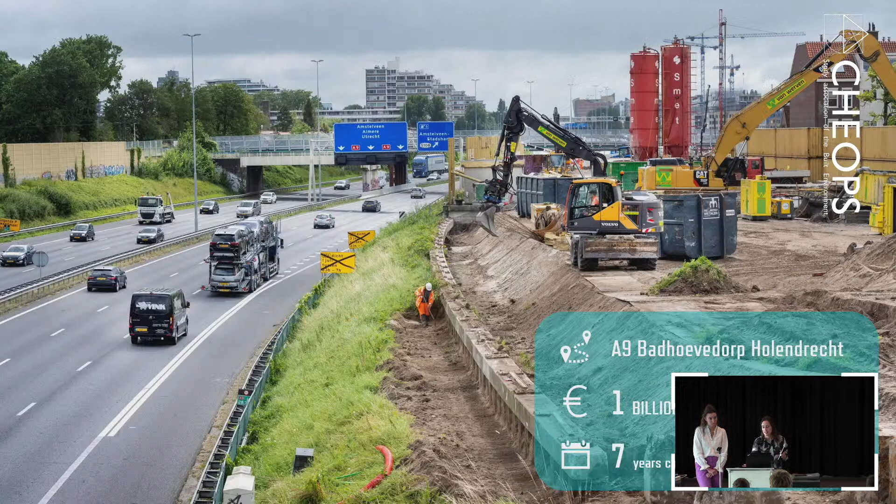So we will show you some main projects we're working on. This is the A9 - we're currently extending the track between Badhoevedorp and Holendrecht with one extra lane. This is the biggest project currently going on, with a value of 1 billion euros, so it's huge. We're working there for 7 years to construct it, but then we still need 15 years of maintenance.

What's so complex about this track is it's kilometers long, and you also have a lot of municipalities like Ouder-Amstel and Amstelveen, but also water authorities and many complex structures that also need to be widened. How we won the tender was that we promised the construction would be done side by side with the track.

So transport will always continue, we never close the main highway. You see in this picture that they're still driving but also working at the same time. And this is a picture showing demolition work on the left side where a bypass is being made.

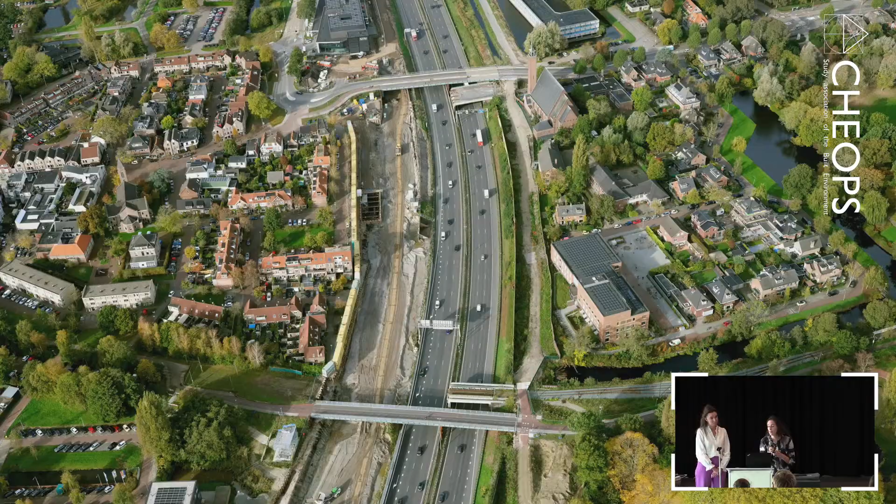Next to that, we also worked on the entree in Amsterdam, a bicycle storage. What's unique about it is it's underneath water, and that's the only one in the world right now. So what was complex about this project?

We were constructing in the middle of a crowded place in Amsterdam, so the building pit couldn't be that large. That's quite complex, and also all the transport had to move around the building pit. We did the project management of it and finished it in January this year.

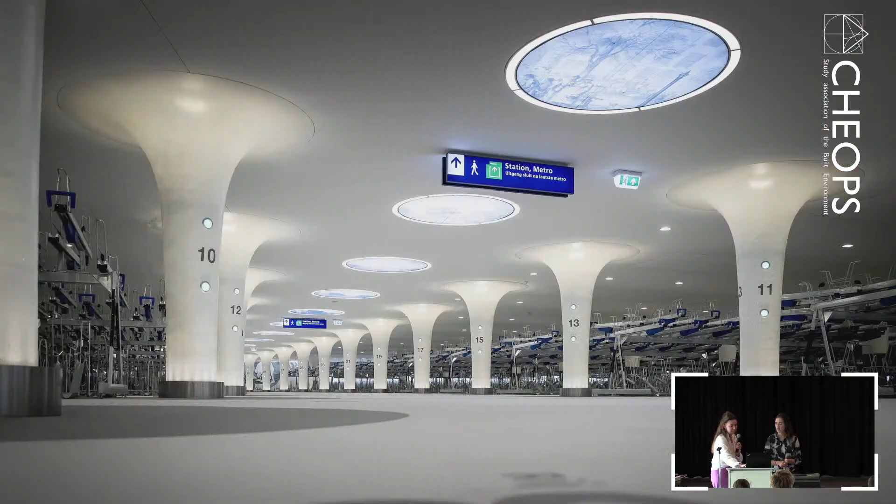So in the next picture you can see the inside of the bicycle storage. Maybe some of you already visited it.

Another one is Project Kademuren in Amsterdam, one of the projects I also worked on. Here we are renovating the quay walls in Amsterdam. As you probably know, many of these walls were constructed a long time ago, but not with the intention that so many trucks and tourists would be walking by.

So a lot of those walls are collapsing currently, and we got the arrangement to reconstruct 2 kilometers of quay walls over the coming 8 years. So this is also a quite big project.

It's also quite complex, similar to the entree project, because you're working in a really small area in the city center of Amsterdam. You have to deal with tourists using the canals for tourist boats, but also a lot of inhabitants living around there, and the houseboats as well. So you can imagine it's quite hard to build something like that in the middle of the city center.

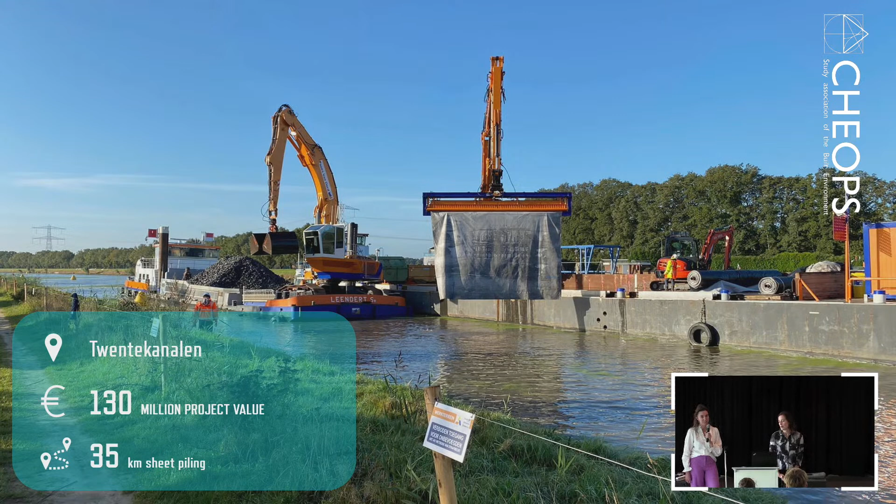Our slogan is 'building new ways'. There are many companies doing project management in such projects, but this company started about 10 years ago with the intention to do it in a smarter and newer way, because the construction market is very conservative, so there's not that much innovation.

We are trying to do that with the people we have, the technology we apply, and the partners we have. Of course, we're not the people who actually do the construction work, but we do the project management side. So inside our company, the people are the key asset, which is why Count & Cooper invests a lot of time and effort in people—through trainings and the selection procedure we have.

I really like that there's so much space for development and time to grow inside the company. So a lot of focus on the people.

And besides that, we really focus on tech. For example, at the Twentekanalen project, we implemented a dashboard where we can see the groundwater level along the whole channel. By doing that, we can see if, due to our work, the groundwater level is changing, stable, or increasing. When it increases, we get a notification and can immediately react. So we're improving construction and efficiency by implementing dashboarding.

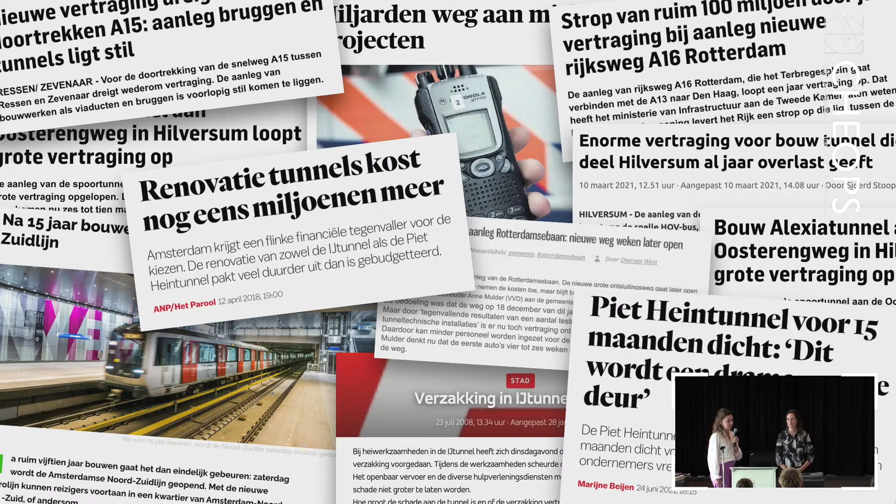We think it's no longer possible to just deliver projects by being good at construction. So we focus on delivery management, and we always think about what's best for the project, and therefore have clear communication, and of course technology always plays a role in it. Besides that, we think we can really change the construction sector by being part of it instead of just advising. That's also why we're not just a consultancy, because we're really participating in the project.

So we are focused on tendering and project management, but I can imagine that it's a bit vague what project management is. Here are some main things we focus on as a company. We often have people working in contracting procurement or financial control. Planning and risk is something we always do.

That's what I did in the Kademuren project. But also focusing on quality and performing audits to test your internal processes. We always have a stakeholder team from our side, like you are part of now.

And we have a whole team of digital project management. There's a whole team inside our company focused on data analysis, making things smarter and more efficient, and connecting data together. They're always connected, always part of our teams at the project. That's also a really nice area. We try to look at how we can make our teams work better together and more efficiently.

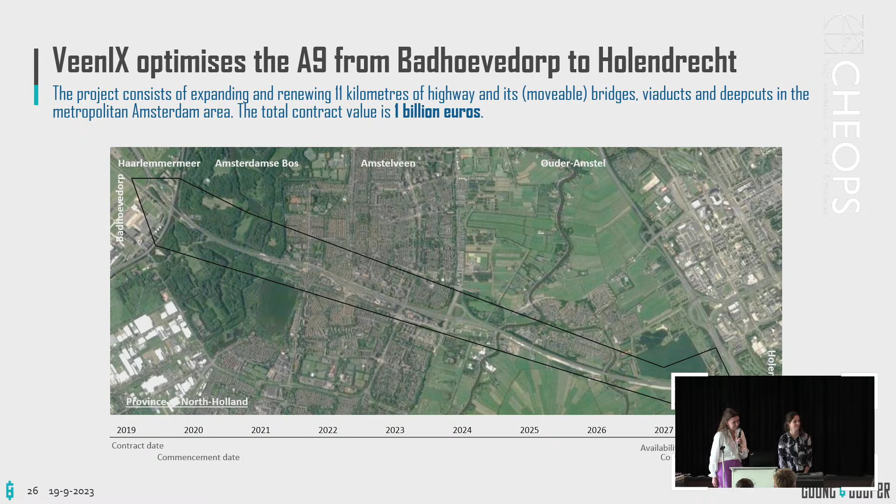If we zoom in a bit, the highway includes a lot of structures. In Dutch, we call it kunstwerken, so therefore we often use the letters KW to name the structure.

The highway crosses through the Amsterdamse Bos, so we cross this forest, and you have flora and fauna included in that. And we go through Amstelveen, so we have a lot of residents living really close to the A9. That's really important for the stakeholder management topic, to satisfy those people and prevent that our works result in too much noise and traffic hindrance. Besides that, the highway continues through Ouderkerk aan de Amstel, and the soil is really weak over there. Laura explained the name VeenIX is because of the highway going through Amstelveen, but it's also about the soil, which is veen in English, peat, and that's also quite challenging to work structures in those soil conditions.

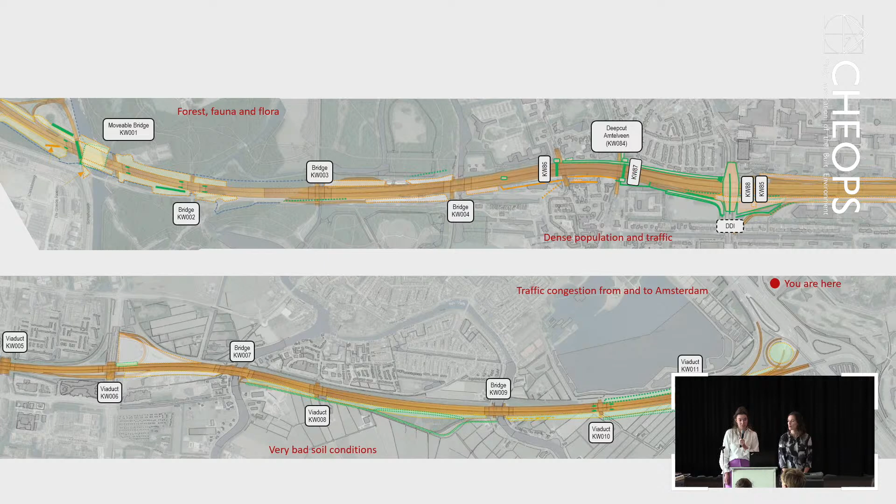Yes, and some facts in a row: this is a highway of 11 kilometers, there are 100,000 residents living around it, and the project is 1 million. It has a value of 1 billion euros. Every day 150,000 cars cross it, and we're going to construct, hopefully, for 7 years and not longer. The planning consists of 20,000 lines of activities that need to happen, so it's enormous.

And we have beforehand 6,500 requirements that are defined and that we all should meet during the project. We are working with around 500 people now, and more than 400,000 documents. So the project is very large. It's so different from the other things that I did before, but it's really nice to see and experience.

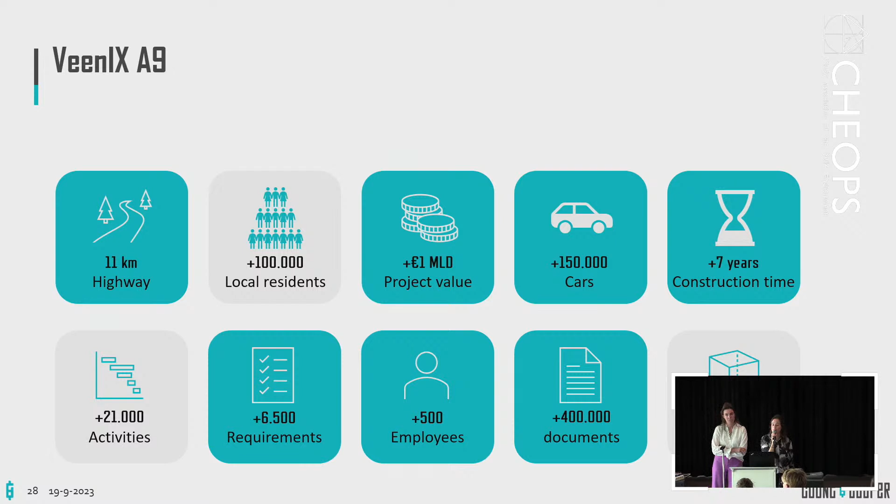And of course Rijkswaterstaat has some requirements that we need to work on together. We have to act responsibly with our stakeholders and satisfy them, look at the noise that we produce, and look for that. In the end, try to control the costs and also time, and focus on sustainability as well.

In order to complete a huge project like this, we divided the highway into 4 sub areas. One is the part on the west side, we have the middle side and the east side, and besides that we have the area paving and roads, which focuses on the highway itself, so asphalting and groundworks. Each sub area includes some complex structures.

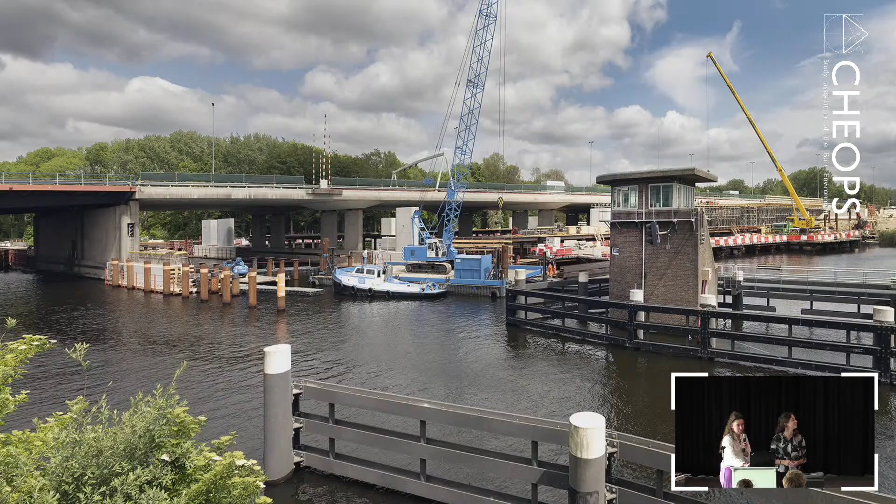Let's zoom in a bit. When we look at the west part, the most complex structure in it is the Schipholbrug, and I'll show it on the picture. You can see it right here. We want to widen the bridge, but since it's a bridge that should be open and closed, we need to replace it at once. But since we promised that the highway will always be open, we're currently building a highway next to it, an extra temporary bridge, in order to let the traffic go over that bridge. So that's quite complex, and you can see the final situation over here.

We also have a small movie about it, and it explains the construction of the Schiphol Bridge. It's in Dutch, but hopefully you can still understand it.

Wat is dit? Wait. Oh, it's reclame. Okay, I have it over here.

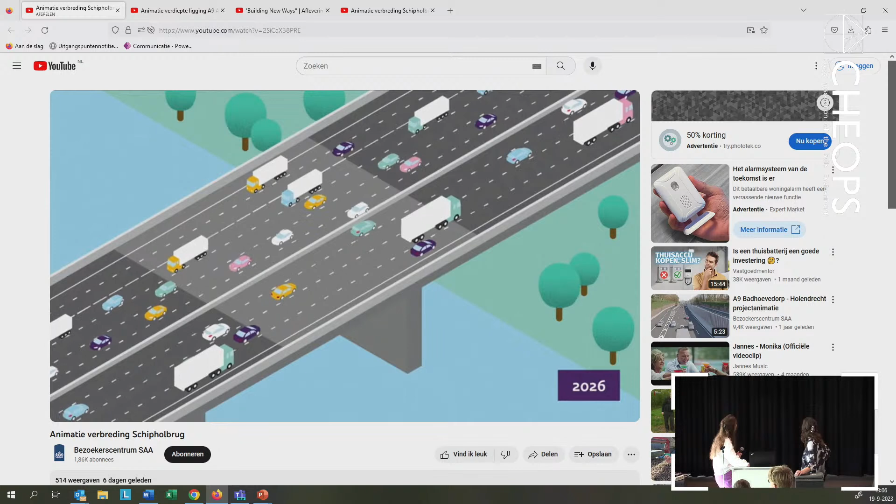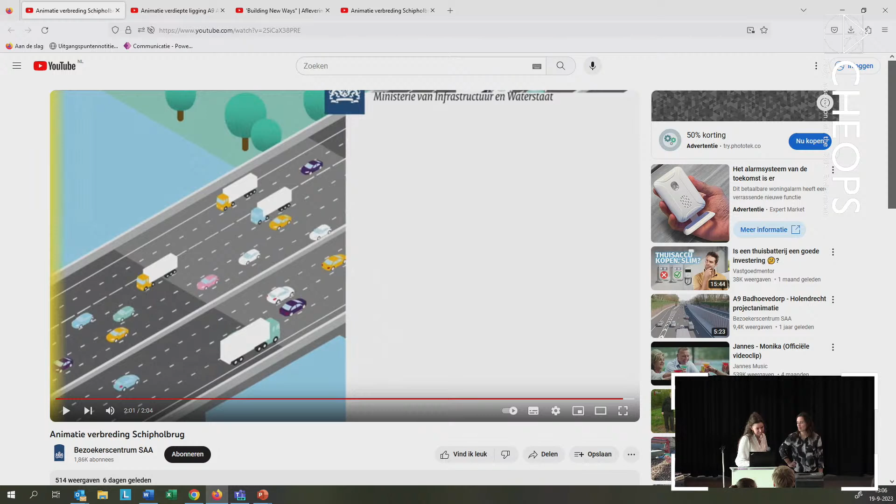Ja. Okay, great. Okay. Yeah.

So that's only the part west, but in the middle, they're going to construct a deep cut, with 3 roofs over it. I'll show a picture. It's kind of hard to explain, but it's also to reduce the hinder from noise from a side.

Currently, it's just a road. So the deep cut is quite complex if you look at the design. And also there's one viaduct and two bridges that need to be extended.

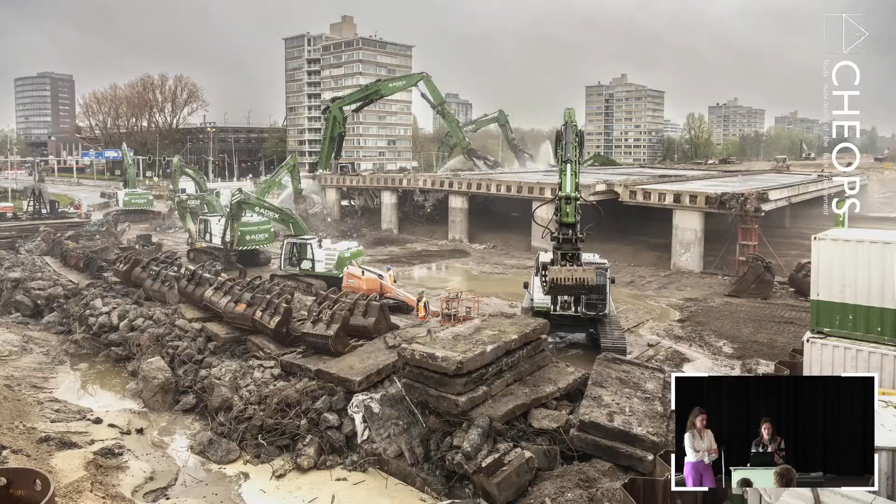And here you see one of the viaducts that's demolished already. So that's this viaduct that you're seeing, which is already demolished.

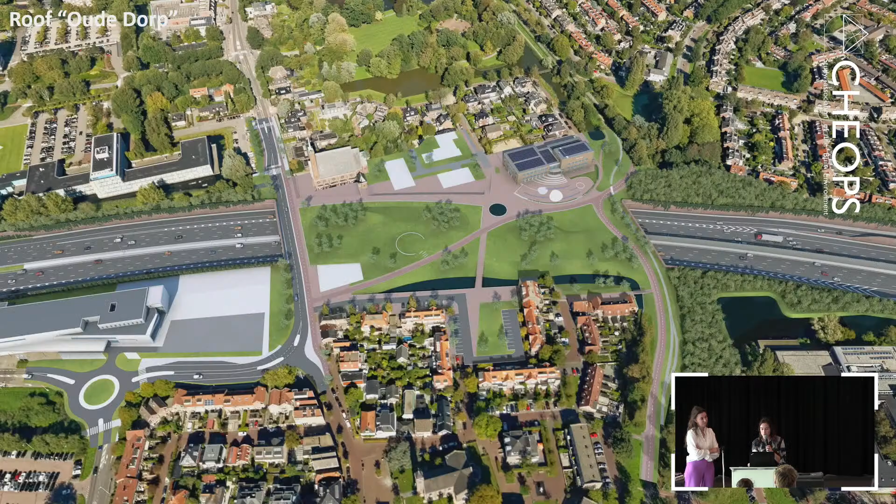In the end situation, there will be 3 roofs. One of the roofs will be like a city park, and the others will also include a cycling bridge or cycling path to connect north and south with each other. In total, there will be 3 roofs. This is one of the most complex parts of the project, as you can maybe imagine.

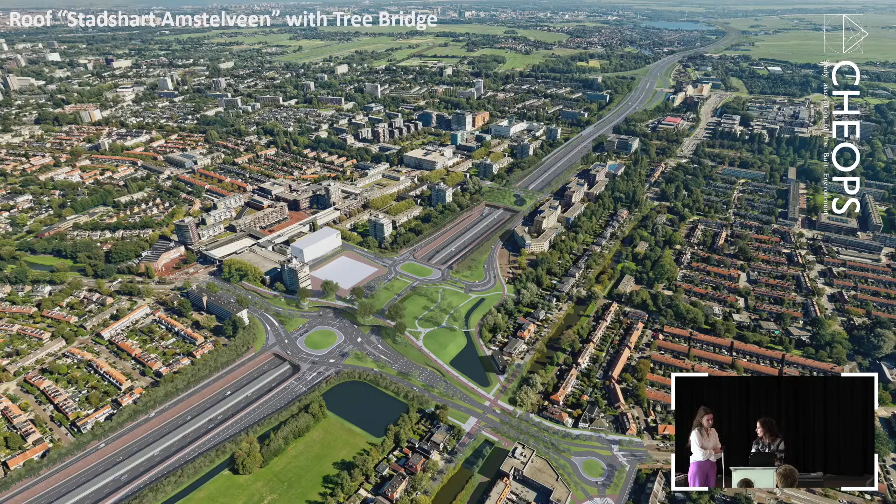I also have a small video to demonstrate it better than just pictures.

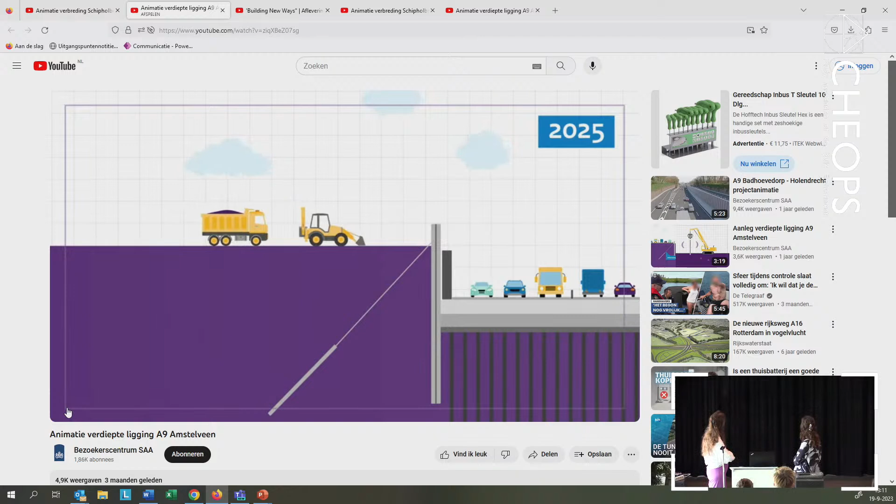So this shows all the steps that are needed to finish the deep cut.

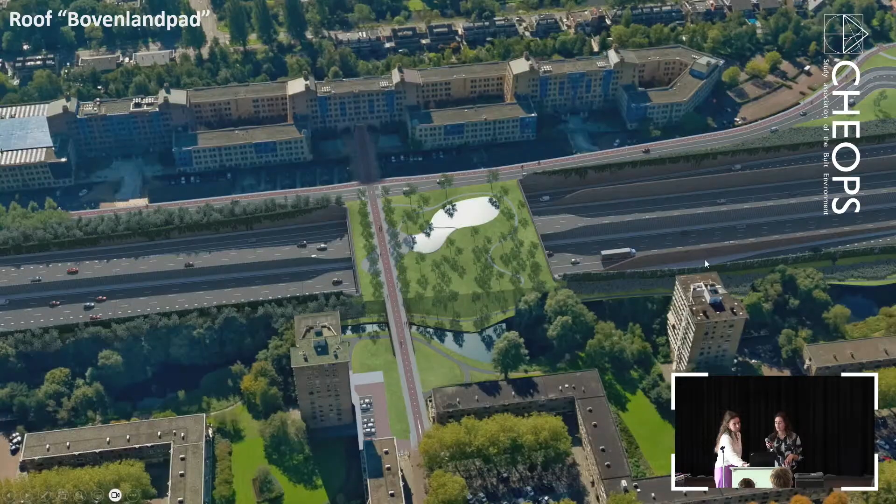Besides that, we have the section east. It's the largest section, and it includes a lot of civil structures, so viaducts and some bridges. And as I said before, the ground, the soil, is a bit weak over there, so that's quite challenging.

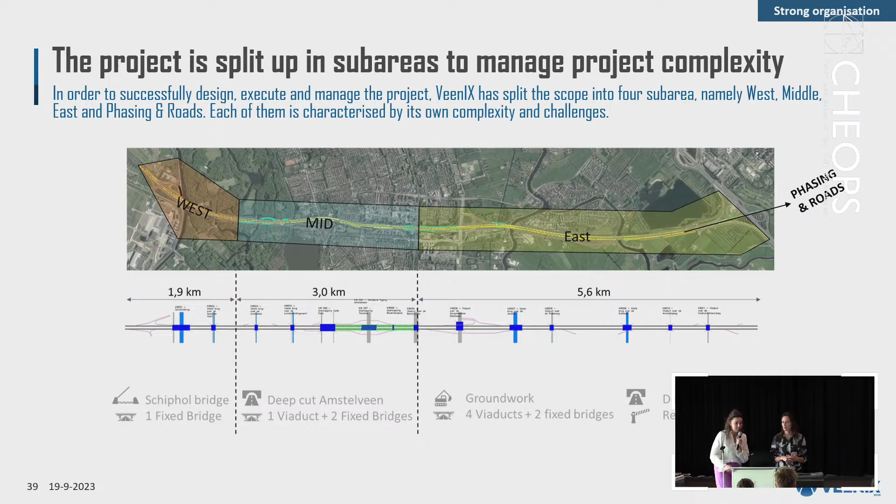As you saw in the video before, this guy was working underwater for almost 5 hours, so that was quite intense, but very nice to see. Hopefully everything is okay over there.

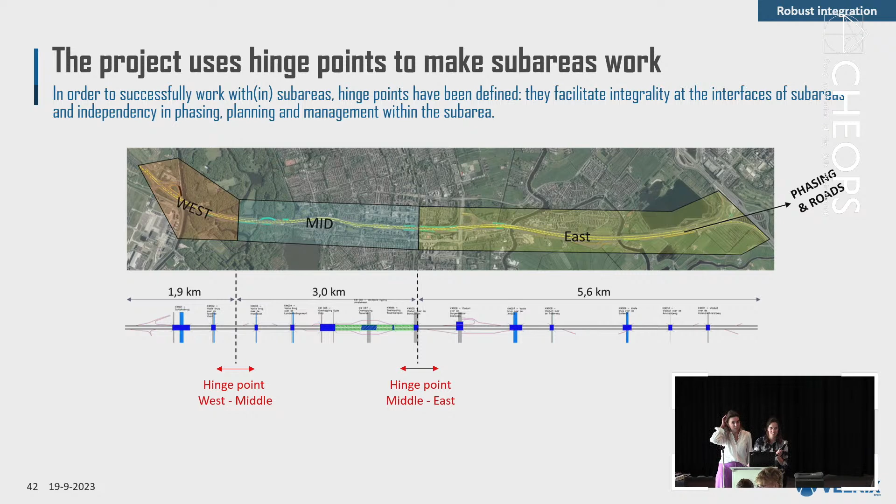Okay, I think - is this the fire alarm? No, right? It's not that loud, it's more like a car. Okay, I'll just continue.

On this slide you can see the phasing of a road, and as we promised that we keep the highway always open for traffic, we really need to think about how we can widen the highway while the traffic just continues. So we realized a bypass, a temporary highway, in order to start at the north part for the deep cut.

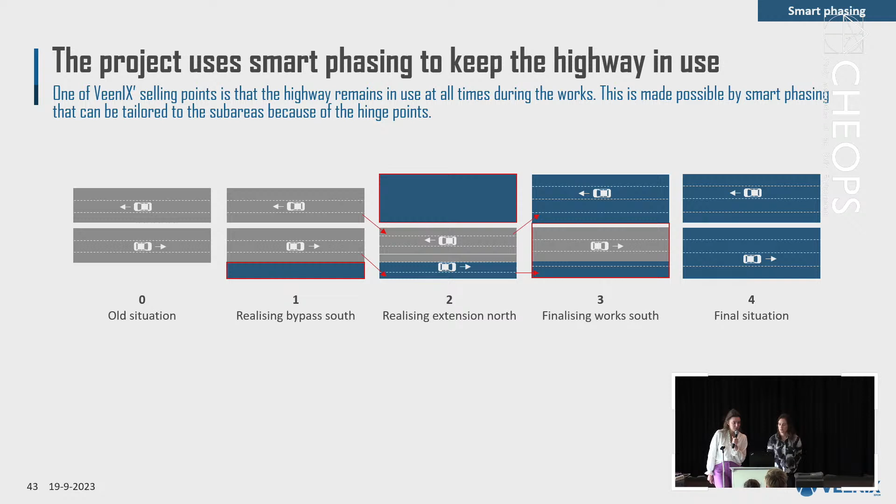I also have a small video about that.

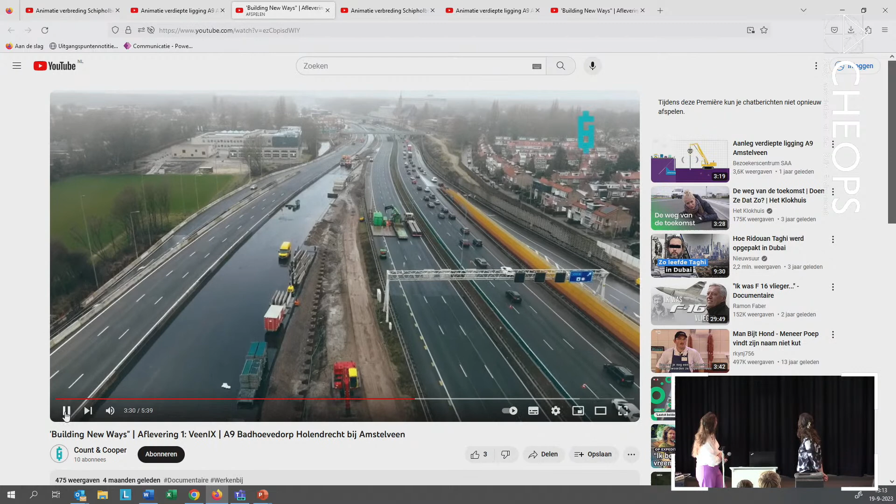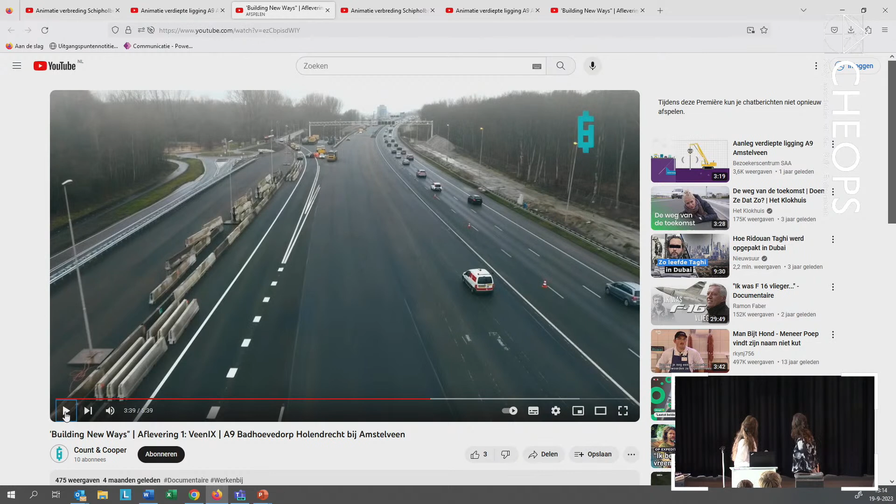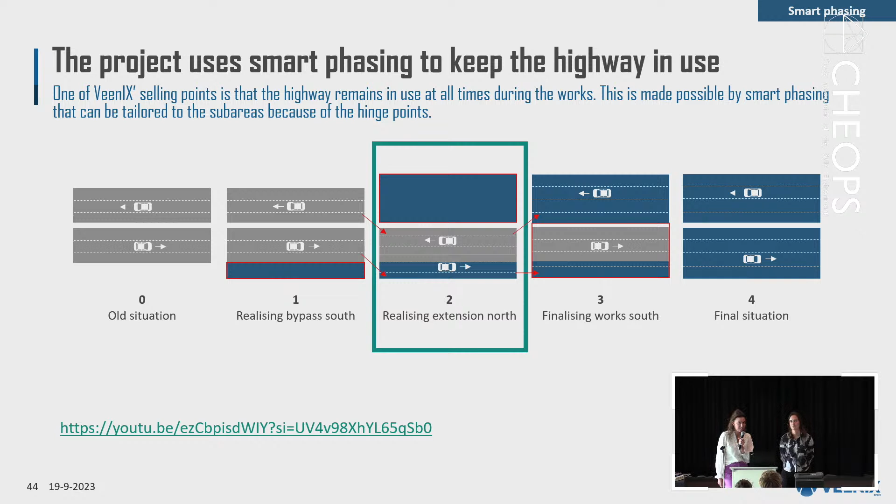In February the bypass was opened, and after that the old highway could be demolished, and we're now working on the deep cut over there. So we're doing a lot of sheet piling, and that's quite heavy and results in a lot of noise for the environment and for the residents. Therefore, stakeholder management is very important in that part.

We collaborate, of course, with our client, Rijkswaterstaat. In the tender, we promised all the project details and how we manage it, and during the project we discuss with them how to solve problems or things happening which we couldn't foresee. Besides that, we have the external stakeholders. We should inform them about the works, and if we want to close a road, we need to discuss it with the municipality.

We have around 25 people on the A9 working from Count&Cooper, with roles more in the strategic part, but also in the digital part, like VeenIX Virtual, which I talked about before. We have a design and integration team, that's my team currently. Furthermore, we have stakeholder managers, permit managers, people focusing on verification and validation, risks, planning. So you see many different roles. There's also a team more focused on the real construction outside, and when you look in our organizational chart, you see that we are fulfilling these roles in the company, in the project.

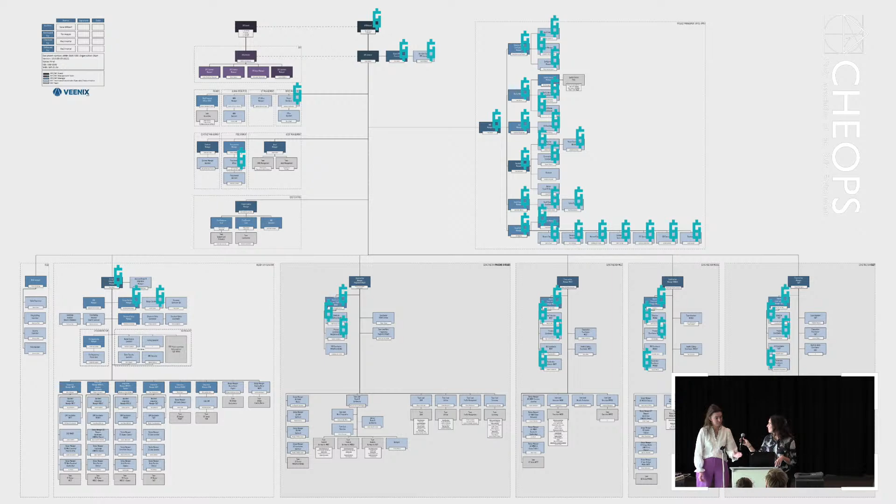So let's zoom in a bit more on our daily tasks. I will start. I'm in the stakeholder management team of VeenIX, and the execution of stakeholder management. We're applying for permits in order to get access to work, and besides that, we're responsible for the communication to residents and Rijkswaterstaat.

There are a lot of topics belonging to stakeholder management, but for example, if we want to close the road for 2 weeks, we really need to think about it and discuss it with a municipality, for example in Amsterdam, and then we hand over a plan of how we want to do our work, for how long the road is closed, and is there an alternative for the cars and bicycles, for example. And another thing is, for example, we can maybe by mistake break something within our project area, but what isn't from us.

We also need to discuss with the stakeholder how we're going to fix it. An example of it is, for example, trees. Sometimes we need to remove a tree in order to continue with our work, and then we need to discuss it with the municipality.

Besides that, we're working on permits. If we are doing work which results in a lot of noise, we need to get a permit for it in order to execute. Besides that, we're doing communication to residents, and I write a lot of letters about the works for the whole A9.

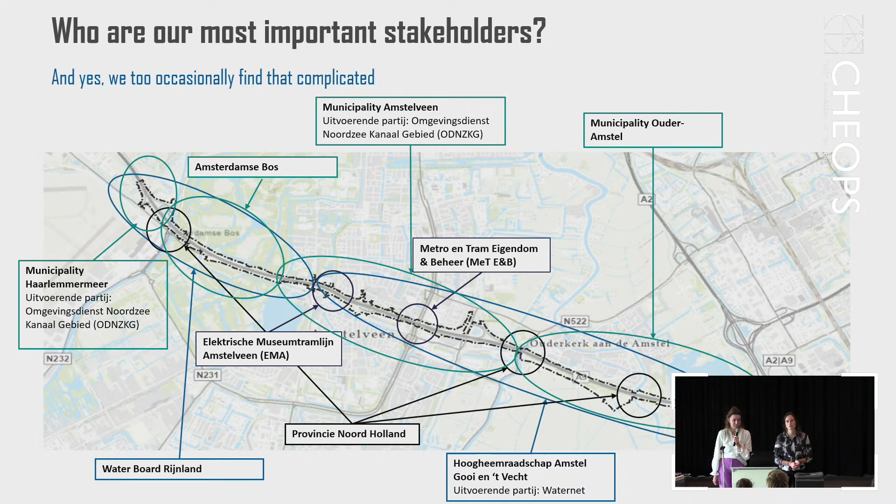Besides that, we sometimes also get some complaints from residents about our work. The complaint we get the most is about the beeps from our machines. In the tender, we promised that we only use white noise, which is not really a beep, but more like a crackling sound. So it's less annoying than a beep, but some machines still use beeps, and then we get complaints about that. Then we need to go outside and tell them that we only can use white noise.

I'm more focused on the design part. As you probably know, there are different phases in design - we have the VO, DO, and UO. Currently we are mainly focused on the execution design. There are more than 30 companies involved in this process to make the final design, and these are the main ones.

I'm focusing on getting the designs reviewed by the right people. The first step is aligning the design internally with the right disciplines - for example, work preparators need to look at it, construction managers, but also more specialists, a party specialized in structural safety, or someone that looks at ecology or sustainability. So I set up the review process and have a lot of meetings to get that aligned, and sometimes it can be very hard because everyone has their own interests.